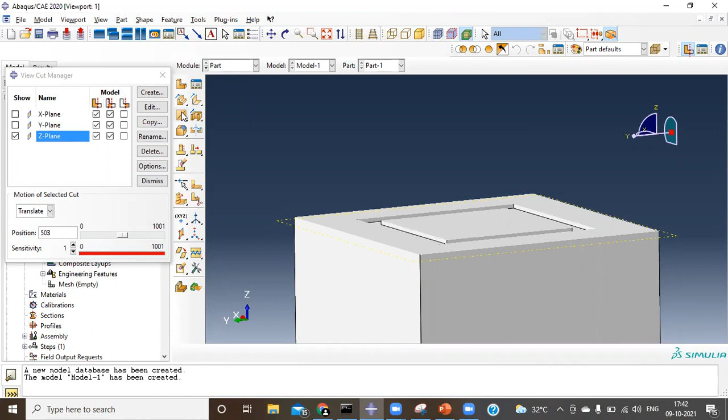Similarly, Ashish, you have to confirm to me whether this particular cut is going to be a square or rectangular one, as we have discussed, or a different one. Okay, sir. If it's a different one, let me do it on that. I'm giving a trial on this, guys. I don't know whether it's going to work or not, but I'm just giving a trial. Let me give it a go.

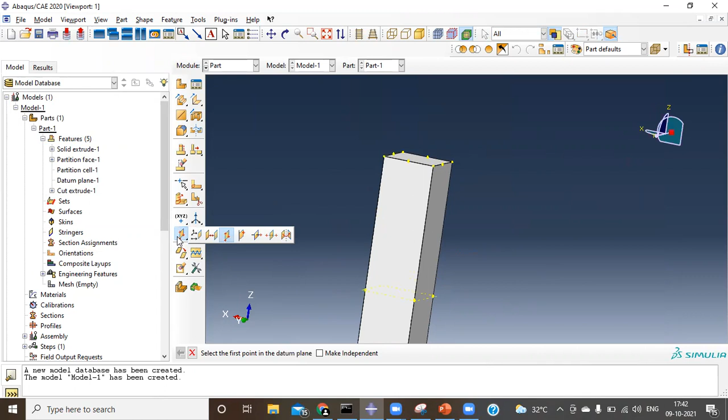Let me go and create a plane again. Not like this. Okay, let me create a plane like this. It's a vertical plane that I'm doing right now. So half of the way. So I'm not sure this will work, but

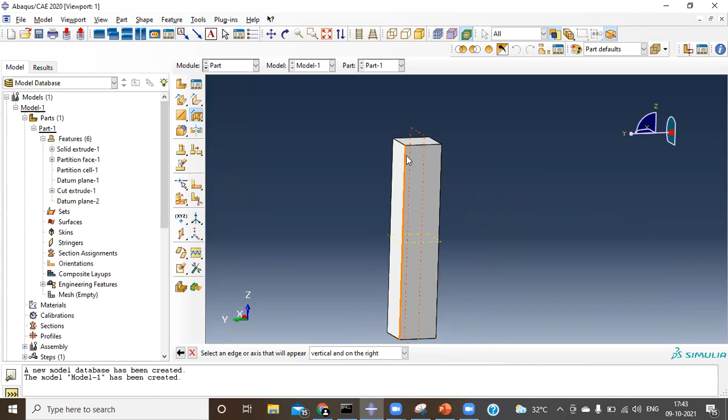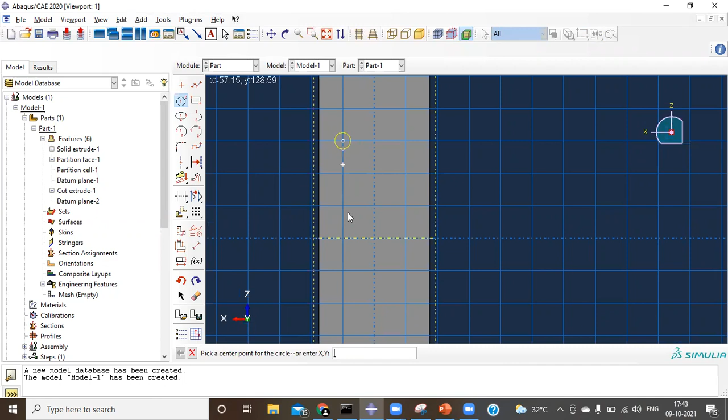this is the case actually for a circle. I can remove on one side, but about the other sides I just need to check. Okay, let me go somewhere just above that. I'm just trying to do this. Done. It's now a blind one. It's not even 100. Just something around 20 mm that we try, or some 50 mm we can go.

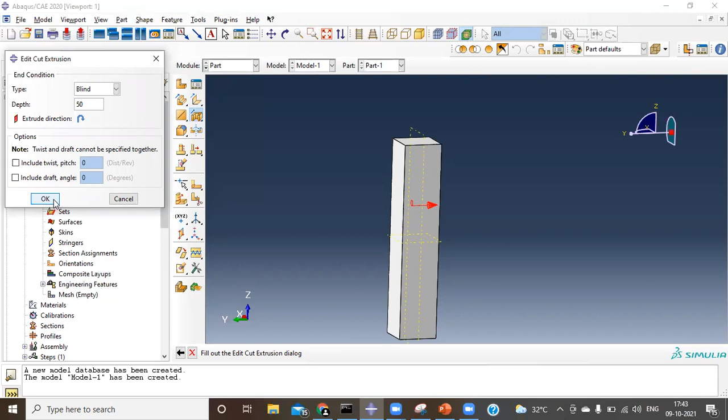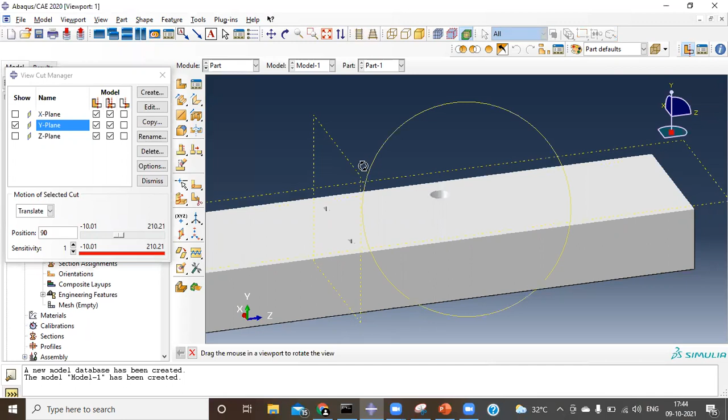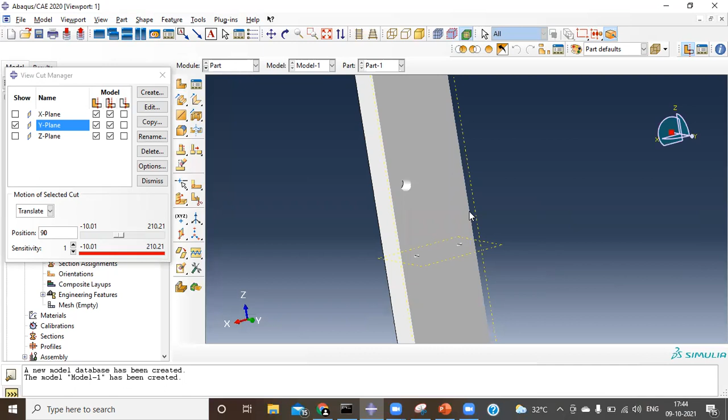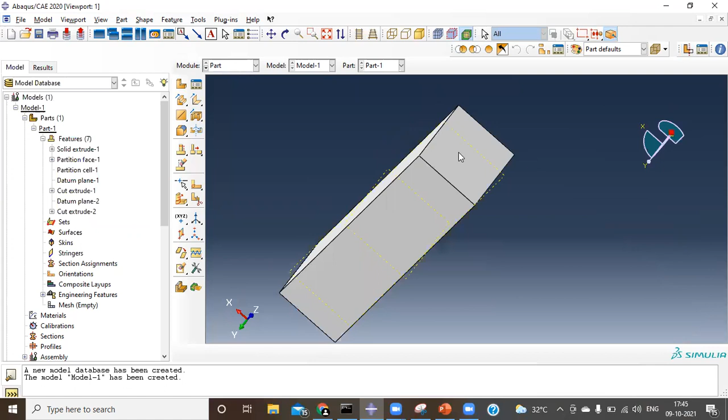Okay, so like that, we have to make it for all the surrounding things. So if you confirm to me, then I'll think on the final cross sections, how best we can go, and I'll help you accommodate those things. Okay. Yes, sir. So like this you can do. Once this job is done, you can go on splitting the other layer also. You know how to do that one, right? Yes, sir. Okay. Once you split it, as we have seen yesterday, you can simply go for your bars and your side bars, everything.

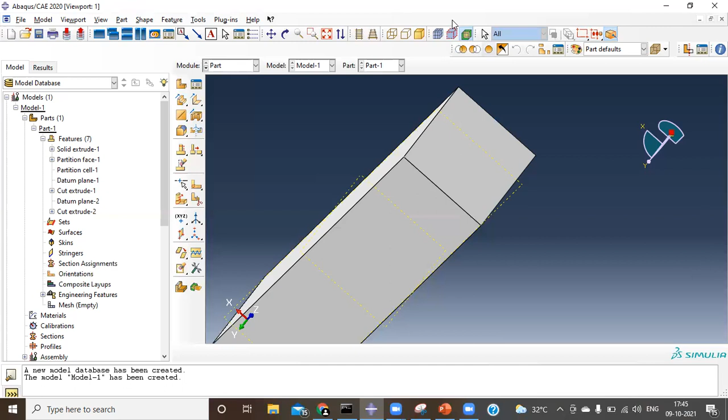And then start assigning. If you are able to do everything over here, this gives you leverage in the assembly process. You can reduce the number of operations in the assembly and straight away work on your components. And this process gives you an advantage of avoiding any kind of penetrations. Okay, like this you can do. So that's how you have to choose it.

So Ashish, once you come back to me with the exact positions of all those things, then I'll help you out. Yes, sir. Right now you know all the things. Only thing is this particular cross section. If it is a rectangular one, you know how to place this. We already placed it. Only thing is if it's circular, I just need to think on that and then I'll let you know how to do those particular things. Sure, sir.

Normally, if it is a circle, we can simply go like this. Create a cut sweep. When I go for this, it may ask for a sketch. Oh, okay. Let me give a trial on this. I'll go for a sketch. Let me take this particular plane, vertical edge. On the bottom side, I try to select the sweep path.

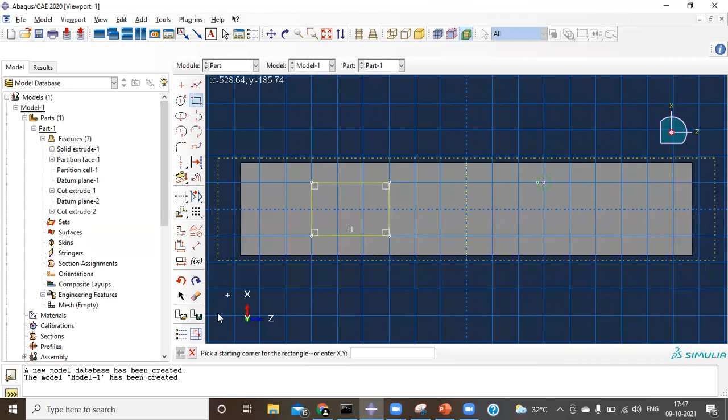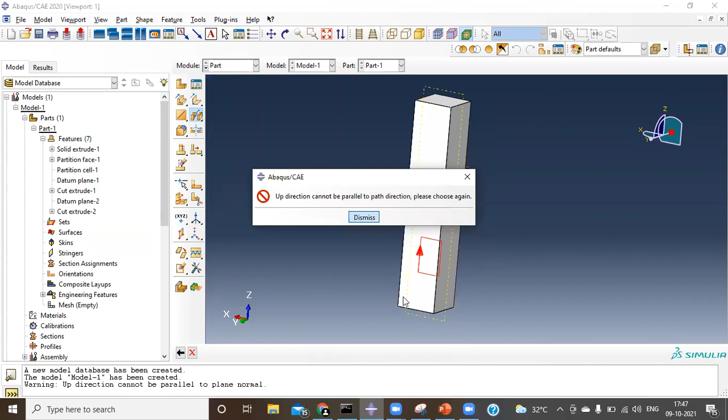Let's say this is not the right one, but let me confirm that. The sweep path, direction is S, and the profile I would like to insert. Plane type is auto calculate, and I would like to choose this profile. Up direction is not possible. Okay, I have chosen this, and this particular profile I'll make a circular one. Then done. So it's all good. Yeah, okay, it's working fine.

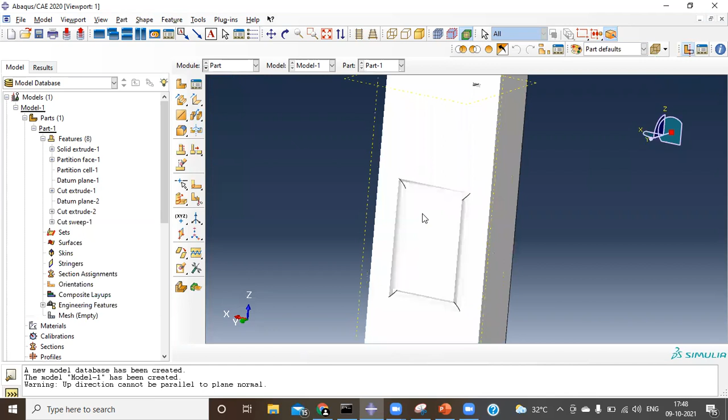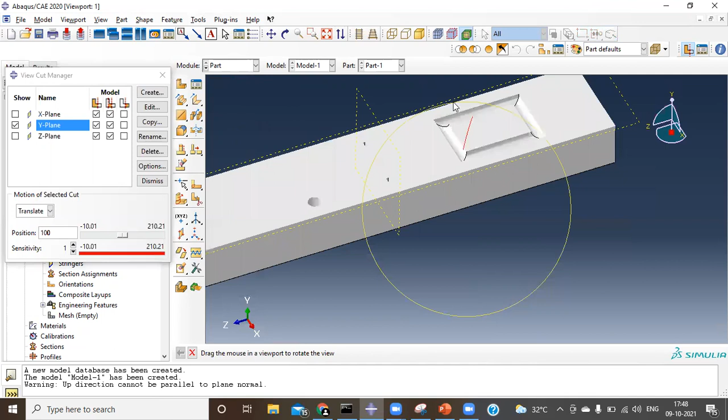I have tried on this particular plane because here we already did something, right? So let me go here. Now you can see the circular shape, it is also done, right? Yes, sir. Okay, so like this you can do. Let me increase the value a little, to 100. So now can you see this? If it's a circular shape, we got that too. I worked on this particular plane. You can select another plane over here and try working on it also. Let me give a trial for you, so you'll come to know about that also.

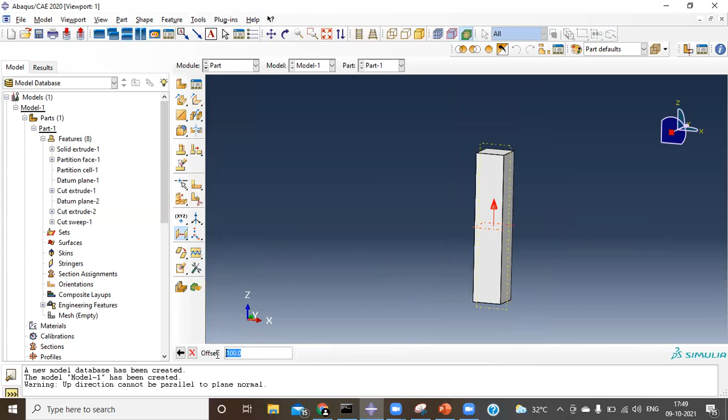We can go and create a datum plane offset from a plane. From this particular plane, I would enter a value in the downward direction, but in the downward direction we already have one geometry. So I'll flip and go in the upward direction. Okay. What value would you like to offset? Offset might be around 50 mm, not more than that.

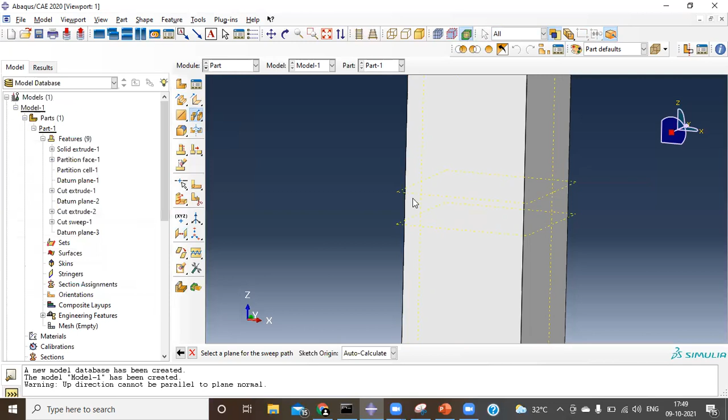Now I got this plane. So now what you can do, you can go to this create cut sweep extrude options. You can select this one. This option is available over here, guys. Normally this is create cut extrude, and this is create cut sweep actually. You can select this one, and you can go to the sketch. You can select the plane that you would like to do, and go and select this vertical thing.

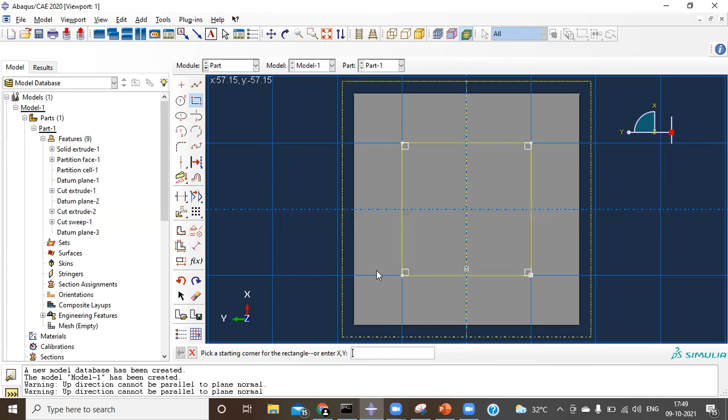If you select a wrong edge also it shows. So you can select them, automate the next one. And sketch is about this particular line that I would like to do. This is my mid line. Okay, so just done. About that particular path, I would like to remove the material. So is the direction of the sweep correct? Yes. And then I would like to go for the profile of my sketch.

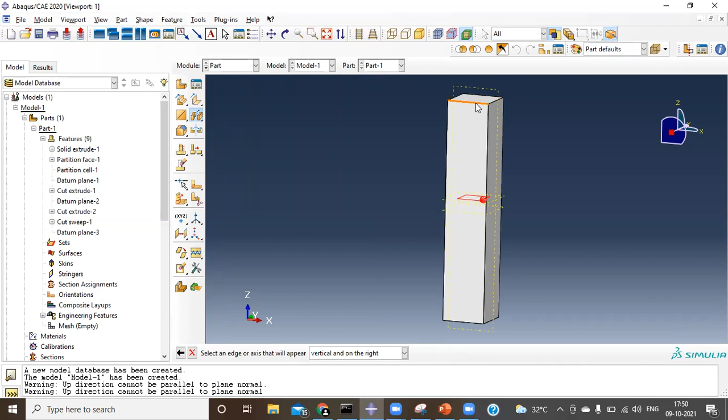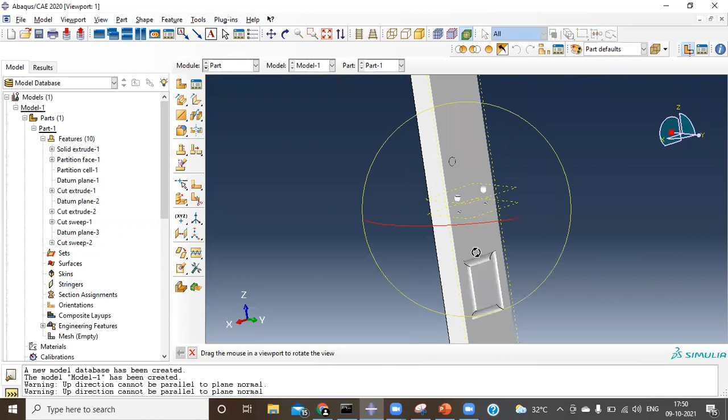So go auto calculate your plane and select your vertical edge. And then here you just do the diameter of your steel bar. Done. So just give OK. Now this is done. So if you want, you can just click on your sectional view of it. Here you can see this one, all the way that you can able to plot, or instead of this, let me go on to Z.

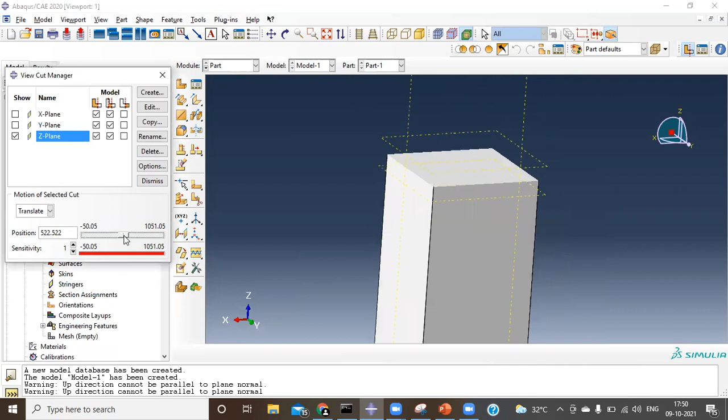So let's keep increasing this. Can you see this right, guys? Yes, sir. This is our circular one, and this is our rectangle one. This is our rectangular one, and this is our circular one. Okay. So like this, you can able to remove the material. And again, you are here removing the material.

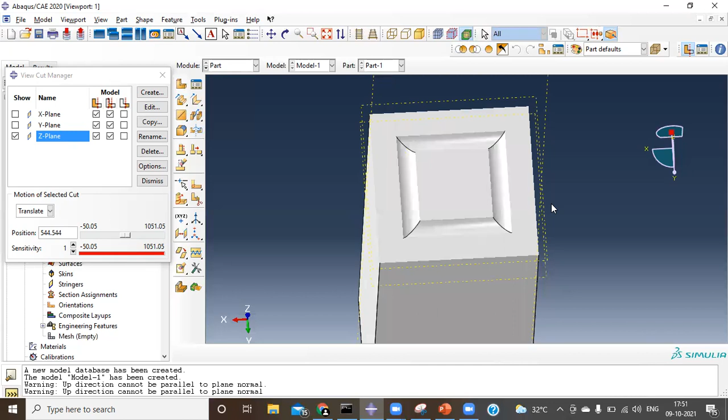With the same profile, you go create a new part with the same operations for the steel rings, and then you are going to place those particular rings over here. That's it. In assembly, we will take care about that, okay? Only one profile that you are going to create. Let me show on that also.

So what you can do is now, just go create a new part. It's a part 2 that I would like to do. Such a solid extrusion, everything. It's done. It's not like an extrusion. We can able to cut, remove this particular things. About the sweep, I would like to do this. So create a part, 3D, deformable, solid, sweep. It's a sweep. So continue on this. And now let me fix up these heights also.

Once you can give me the exact geometries, guys, then we won't be getting any kind of merging issues or something. So all those particular challenges we can able to overcome, we need perfect geometries for that. Okay, this is done, right? So now what I can do, set the entities for the fix. That's done. Now sketch the sweep path.

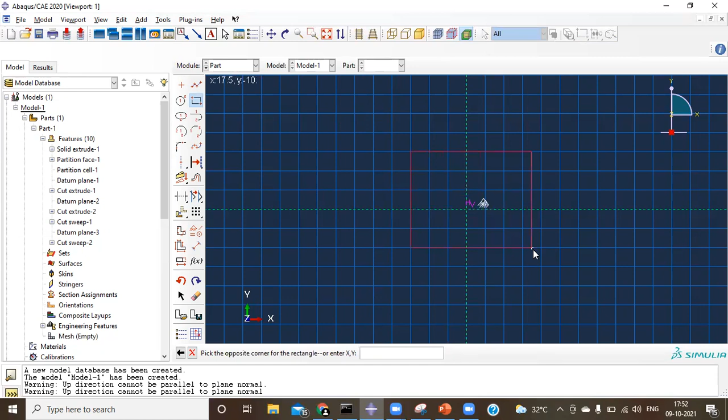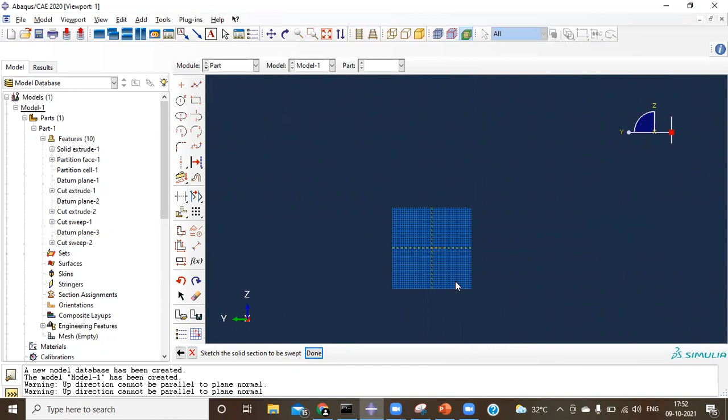I would like to do in this particular path. Sweep path is done, and the sweep direction starts from here and it goes on and comes over here. Enter the maximum scale for the section is 200. Okay, no issues. Now this is where it is asking you to draw that particular circle over here. Here I'd like to draw that circle. That's the diameter of my steel ring inside that. So then done.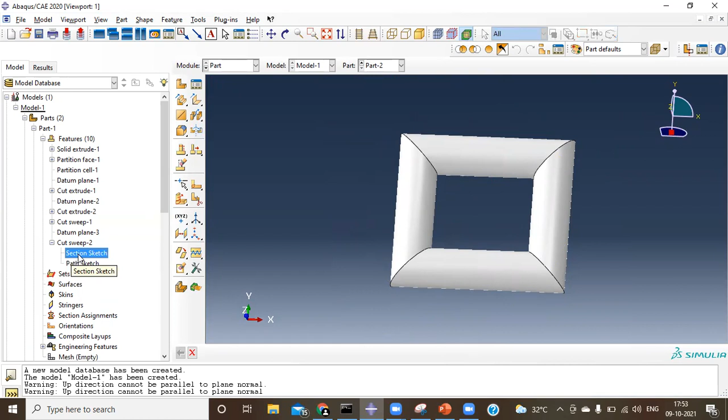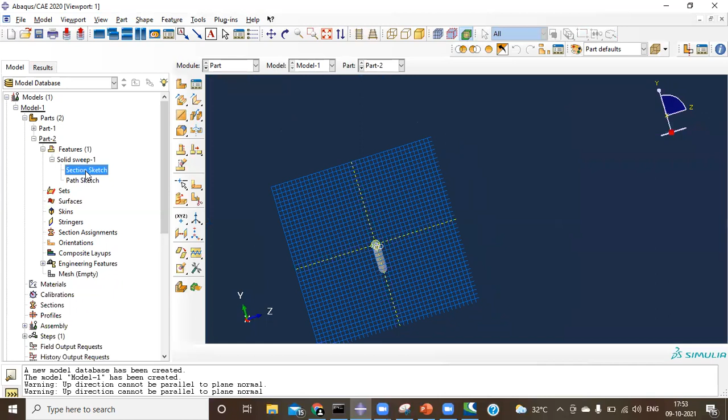Maybe for looking it's too odd because maybe the diameter is too large over there, but you can just go cut sweep, right? It's like a selection of your sketch. Oh no, sorry. This is for part 2. So part 2, in the features I can go, solid sweep I can go. Now in the part sketch, that's where we have it, right?

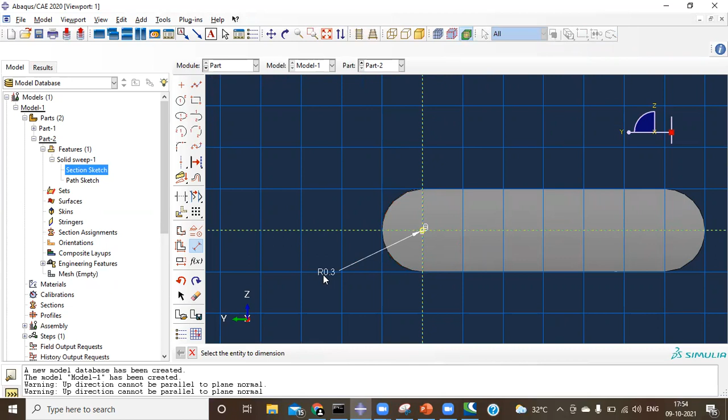So let me bring down to a radius of not 5, maybe radius of some 0.3 or something. 5 mm radius is also there, right? 5 mm rods are there. But anyways, I'm just going on with very less, for better visualization. Now go to features and regenerate on it, then it will change automatically. Now for your better visualization, it looks like this. You agree this looks good, right? Yes, sir. Okay, so these things I'm just going to assemble.

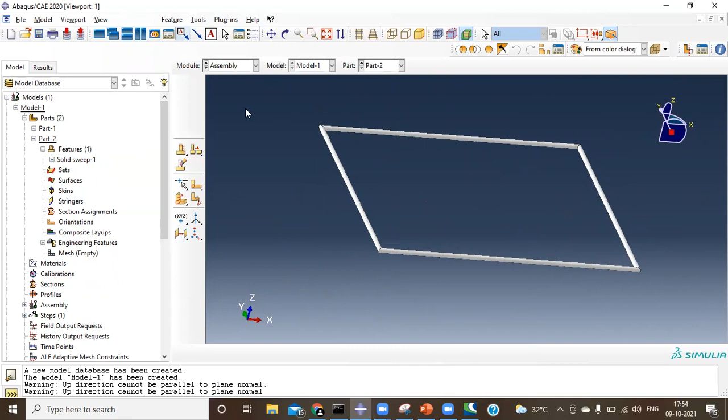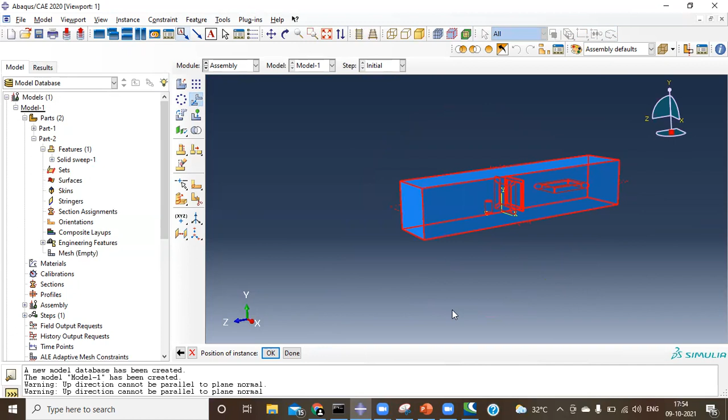When I just go to an assembly module, here I have not went with the dimensions, so it looks very hard when I just bring it up. So it's inside somewhere else. Like when I just try to translate this from this part to this part, we may not see. This is where the part actually is. So I can just select this, start from this to this if I just move. Oh, all the parts are getting up.

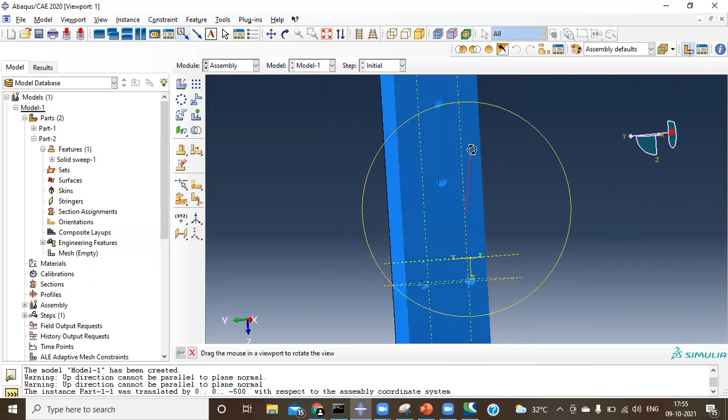So what I can do is with the dimensions I should map and automatically it can come. If I just go over here, it's coming outside, see this. Somewhere else that particular part went. Let me go in my assembly, instance 2, this is part 1, and this is part 2, it's lying here. Part 2 is lying over here.

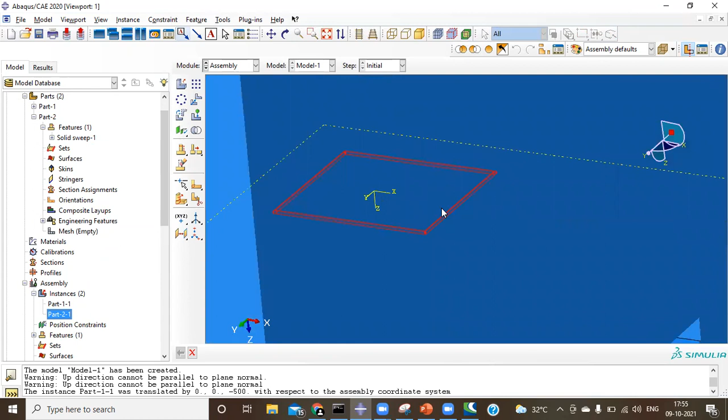So my part 2 is lying here, that means I would still like to move on this. I think chances are there that I can see. Yeah, this is my part.

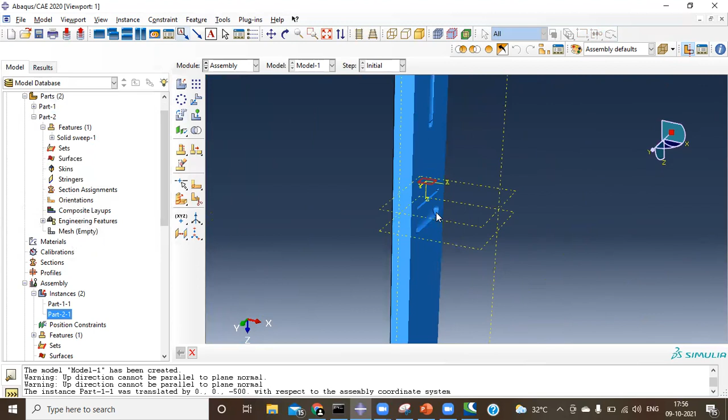I just go click on this. Oh, this is the ring actually. You can see it here, right? So we have to bring a particular ring and place it over to the place where we have to put it. Then automatically you can able to create that.

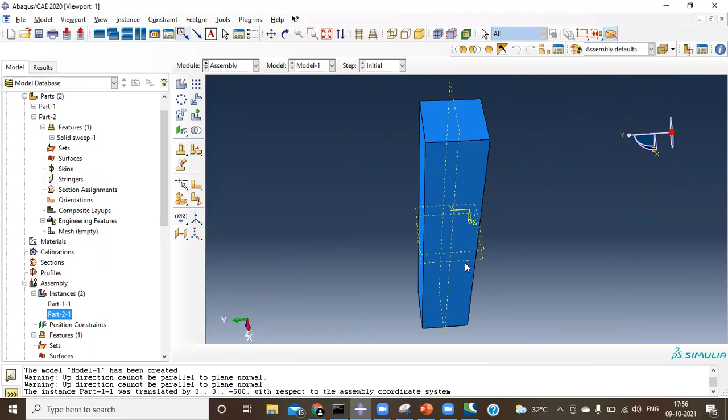Okay sir, this is how we went with the wrong dimensions, so that's why it looks a little hard. But when you go with the right dimensions, it's quite easy. The process is the same.

So now the geometry is clear for you, Ashish. You can create the geometries and you know how to put up these particular bars, how to put up these rings, and how to put up the CFRPs. Once that's done, for both of you, it's only a static analysis for the first case.

I would like to confirm with Omnesh then, what is his case? What does his geometry look like? Sir, dynamic analysis only I have to go for. You have to do dynamic analysis. Yes sir, because my branch is... what's your dynamic loading? Sir, earthquake loading, sir.

Do you have this earthquake data with you? No sir, not right now, but I'll be having it because one of my friends will be sending it. Okay, I'll try to show with some dummy data so we can follow along, and whenever you want, you can replace those values with yours.

First we do the static analysis for Dennis, and you can also learn something from that. Then we can move on with your problem. Okay.